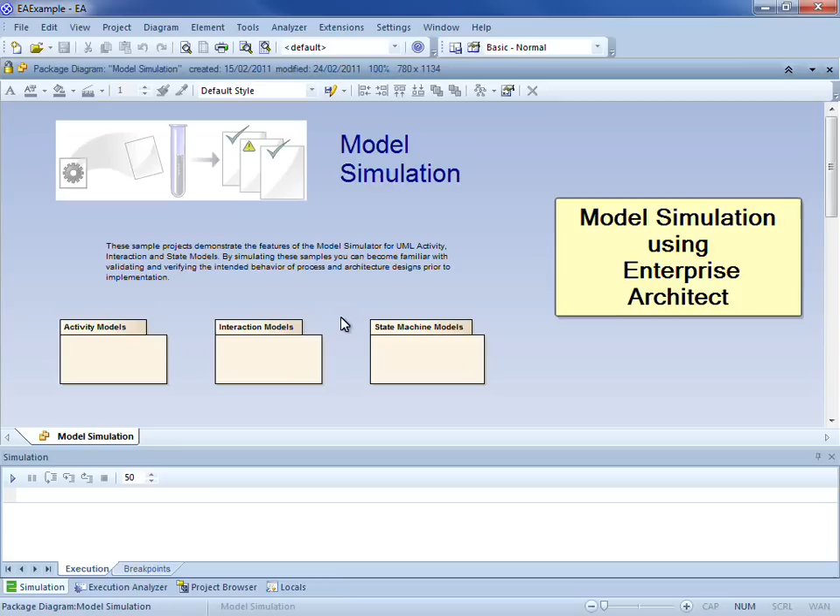Simulation can help you explore different alternatives and assess the impact of decisions before committing funds or implementing a process. The EA example model illustrates how Enterprise Architect can simulate activity diagrams, interactions, and state machines.

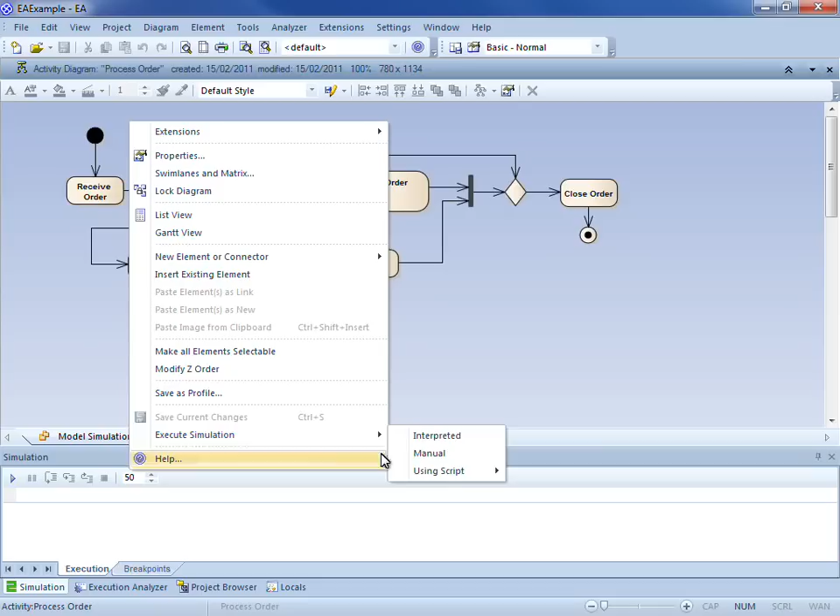In most circumstances, Enterprise Architect can simulate a diagram without any additional configuration. Let's demonstrate using this simple activity diagram. We can use the diagram context menu to execute a simulation. There are three options: interpreted, manual, or we can use an existing build script. In this case, I'm going to select manual.

Each model element will be interpreted as an execution step in the simulation. Enterprise Architect uses shading to obscure inactive nodes. It also highlights the current execution step. It also uses shading and a bold black line to indicate the next potential path, helping you visually track execution at runtime. Enterprise Architect has also provided a dialog box to manually select the most appropriate path.

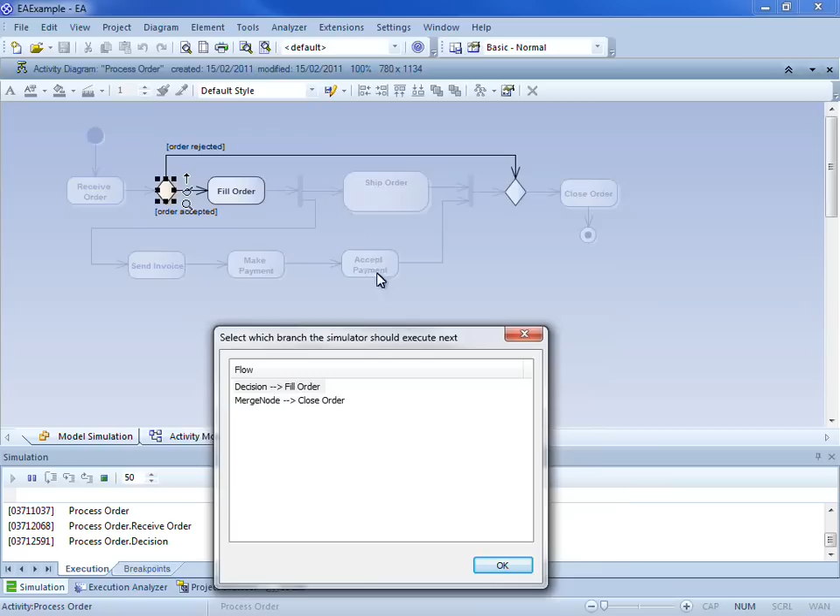I'm going to select Fill Order. You can see that the simulation window now indicates that the simulation has ended.

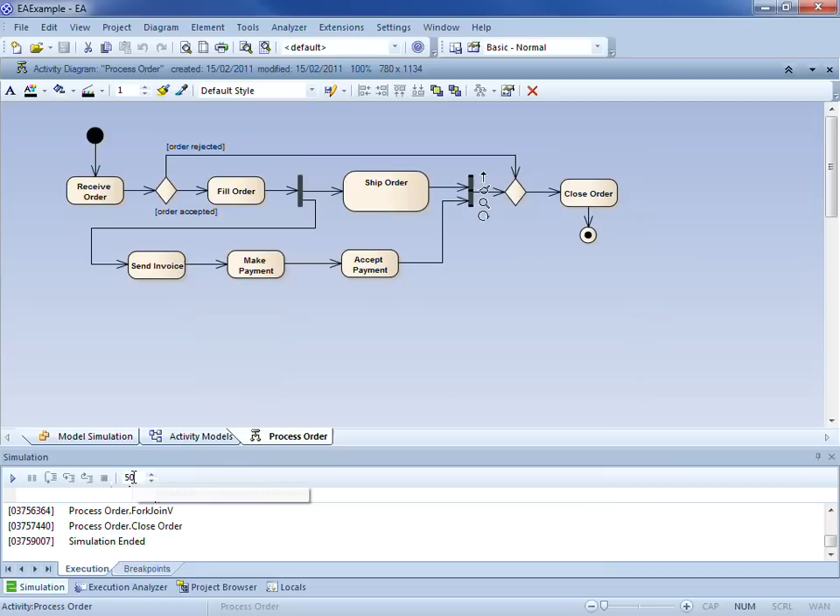The simulation window also provides tools to play, pause, and stop a simulation. If a simulation was too fast or too slow, you can adjust the speed of the simulation to better suit your needs.

I shall now demonstrate the dynamic simulation capabilities of Enterprise Architect, and I'll do this by looking at this state machine model. The state machine on screen describes the state of a pedestrian crossing and demonstrates the capability of evaluating code during a simulation. The code itself has been written using JavaScript.

If we open the execution analyzer, we can look at the build script for our simulation. You can see that we specify the entry point, which is pedestrian crossing. We have a UML basic platform, and we've also selected an option to evaluate guards and effects using JavaScript.

It's important to note that this option is only available in the Corporate Edition and above. In the Professional Edition, simulation can only occur manually. This input box can be used to initialize variables that will be used throughout the simulation.

Let's have a look at how guards and effects are implemented in our simulation. If I double click this transition, you can see that there is a guard and effect listed here on screen. Enterprise Architect tests the guards on outgoing transitions and control flows and will only move forward if there is a single true path to follow.

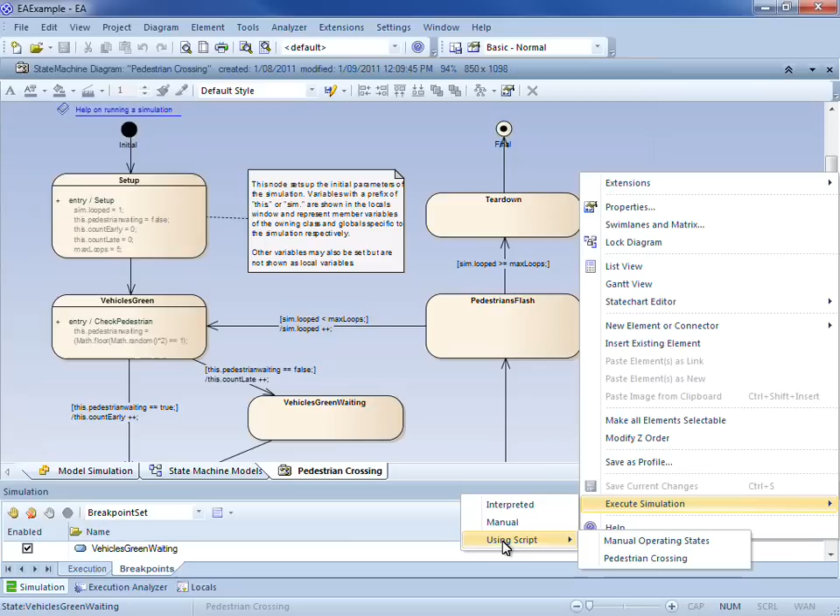There are three separate techniques for executing a simulation. Let's have a look at them now. So I can either do it via an interpreted method, a manual method, or I can use the build script. In this particular example, I'm going to select interpreted.

You can see that execution has halted at our breakpoint, which is represented by this small green circle. If we look at the local variables window, you can see that there are a number of variables listed.

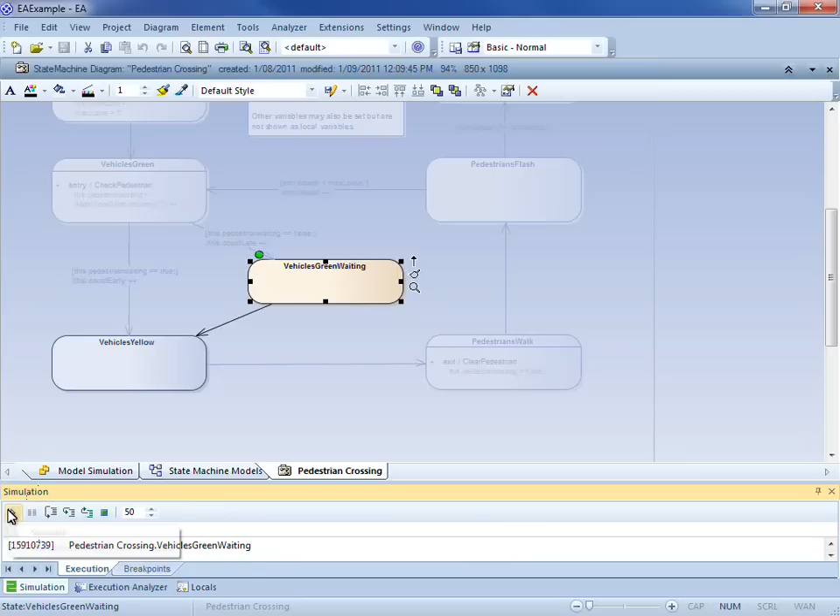What I'm now going to do is use the simulation window to resume execution until the end of the simulation.

Finally, I'm going to demonstrate how to simulate an interaction. You can see that the interaction is shown on screen. We can use the execution analyzer once again to look at our build script.

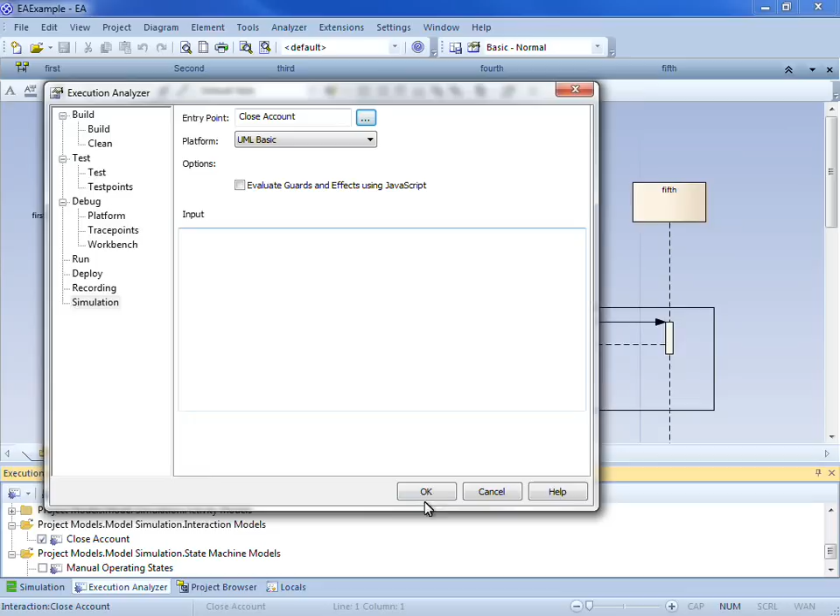And you can see that the entry point is close account. The platform is UML Basic, however this time we have not selected the option to evaluate guards and effects using JavaScript. What I'm going to do is right click our build script to start our simulation.

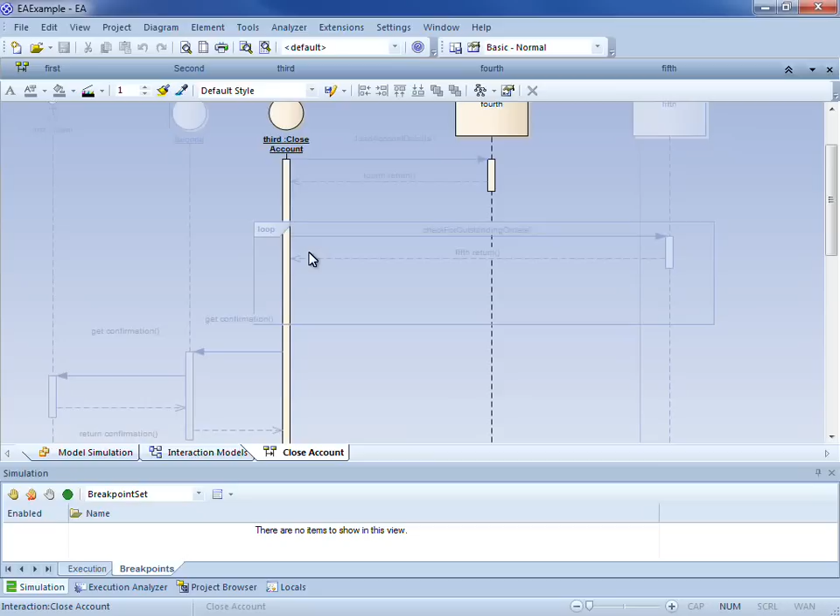Once again, Enterprise Architect allows us to select an appropriate branch. I'm going to get confirmation. If we have a look at the execution, you can see that the simulation has now ended.